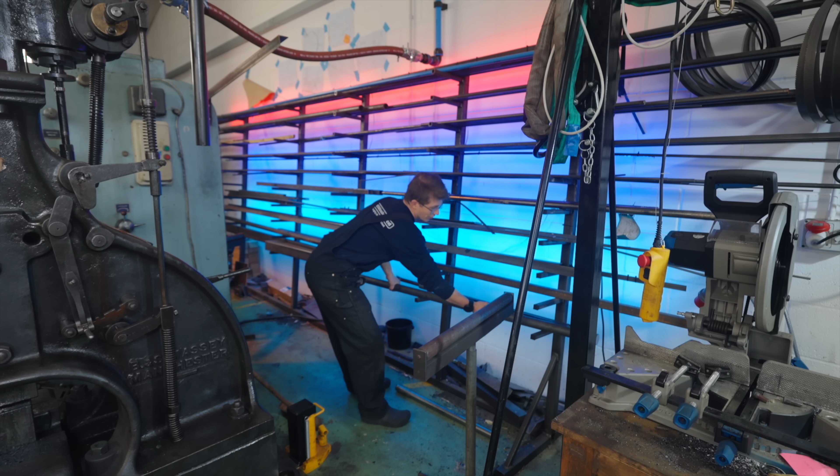I want to try making my own titanium Damascus glasses. I had to get my first pair of glasses at the age of 11, and at the same age, I fell in love with making things from steel. The idea of making my own glasses has been lurking in the back of my head for a long time, but there are some downsides to my namesake material. It's quite heavy, it rusts, and it will tarnish the skin.

But over the last few months, we've been figuring out how to make titanium Damascus here in the workshop, and it's got some great advantages. It's about 45% lighter than steel, it can be about 30% stronger, and we can turn it into some amazing patterns with crazy colors. So hopefully we're going to take this idea from the back of my mind, slap it on my face, and make my own pair of titanium Damascus glasses. The first step is material prep.

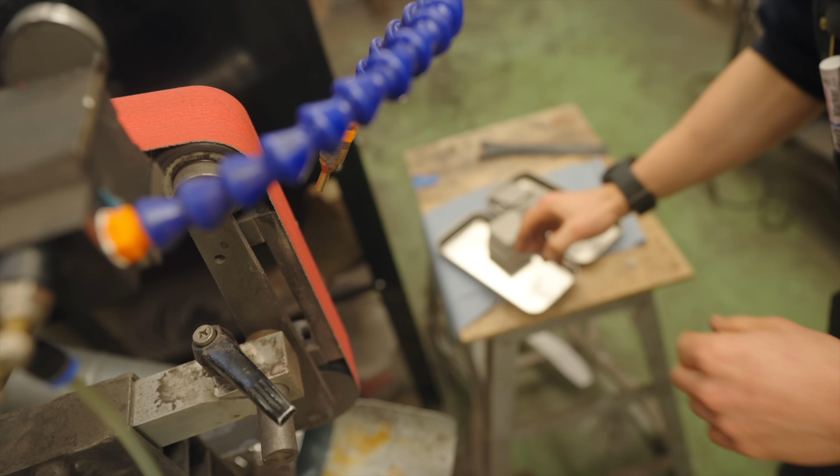Bugger! Oh my god! We are approximately a minute into the video and it is already side project time. I've been having to do a lot of cleaning of small little bits of thin material recently, and it's a nightmare. Doing it on the belt grinder, I end up grinding my fingers more than the workpiece. This Scotch-Brite wheel's okay, but sometimes not aggressive enough and also has a tendency to throw the pieces.

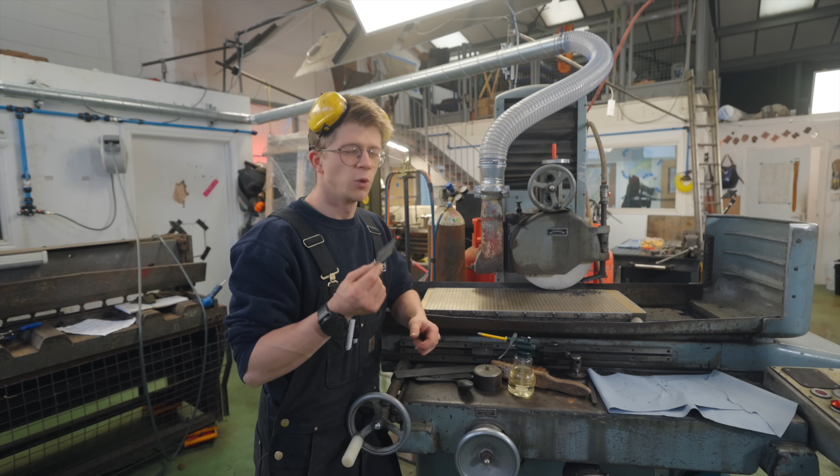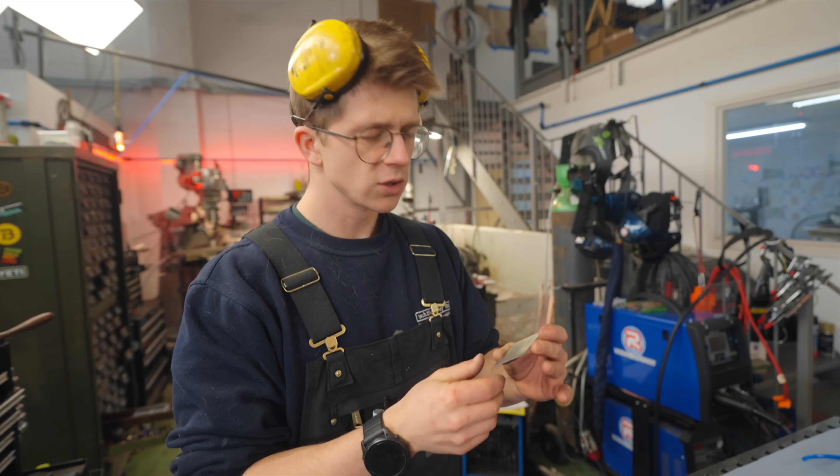One of my options of cleaning these parts is to use the surface grinder, which is something I do want to try, but because titanium's non-magnetic, it's going to require gluing the pieces down. And my suspicion is that that's going to be less efficient than just quickly cleaning the bits up at the belt grinder or the mop. So I then thought to myself, what if we could suck it? They use vacuum fixtures all the time in industry. Why don't we try making our own? A little plate with about 1.5 millimeters lip, a hole, something to seal it, connected over to the vacuum pump.

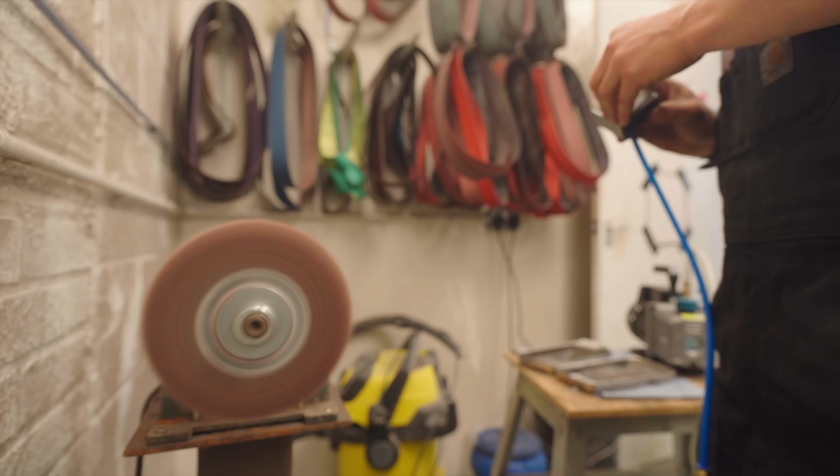It's not bad, eh? Let's see if this is a decent proof of concept. It's brilliant! This is great! I'm quite hopeful that we're going to be seeing a few more of these in other people's workshops. Please don't hold me responsible if this blows up your vacuum pumps, though. It's probably not very healthy for it.

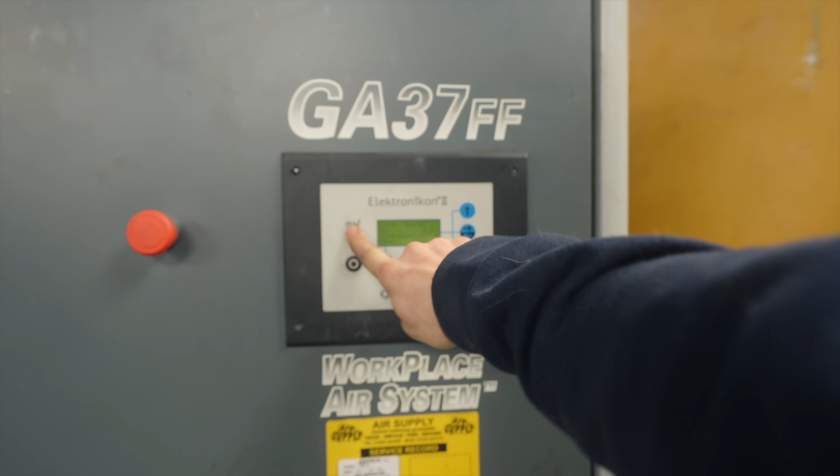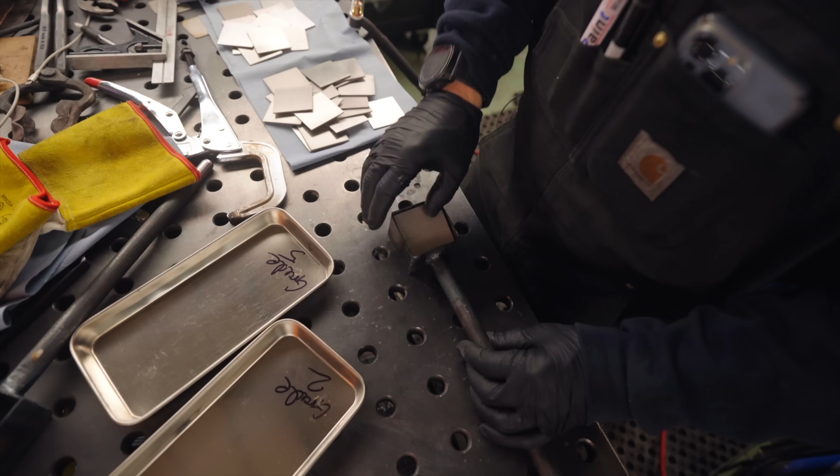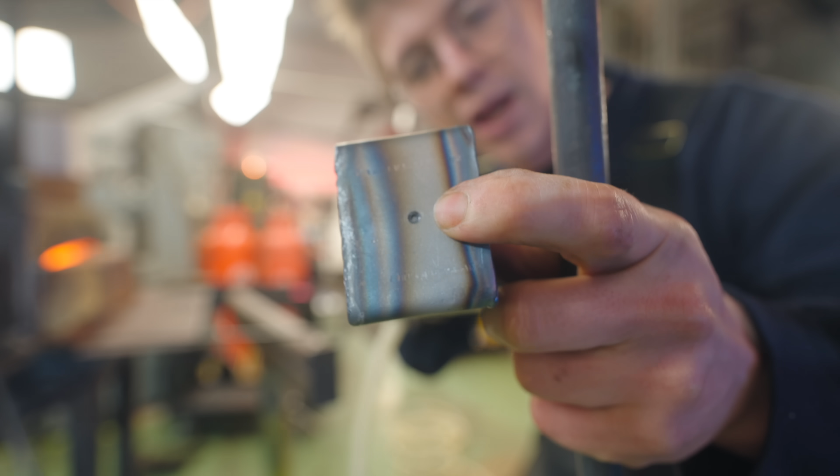We got 2 tasty chunks, 2 blockerinos. Reminder if you're new, the whole purpose of these boxes, these canisters, is so that I can pump argon gas through this tube and out that little hole to fill the insides with that argon, which is inert and means that we're not going to have oxygen reacting with the titanium. Go time!

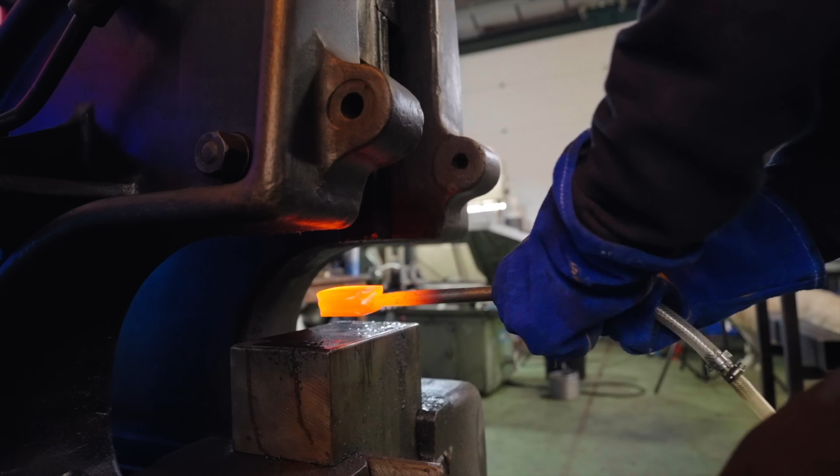That's worrying. That tells me something's not right inside there. Whoop. The fact that it wasn't showing an even temperature throughout shows me that heat isn't conducting as it should, and something's been allowed to cool down way more than it should, which wouldn't happen if it was one homogeneous block. There's a very good chance that I've ruined that billet. Next one in. Here we go.

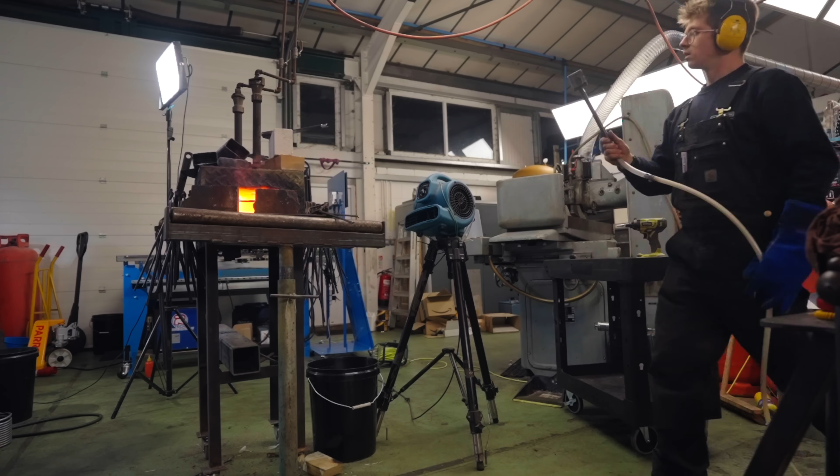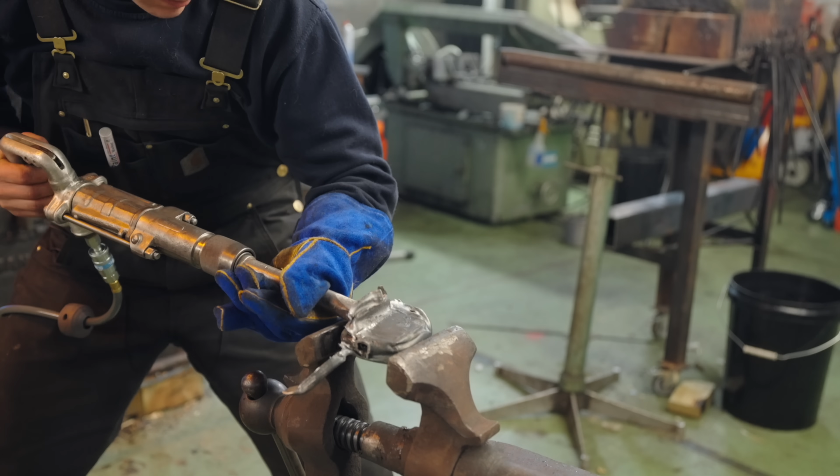Wow, that's weird. So, we can take the jacket off once they're welded because the oxygen's not going to get between the layers once it's stuck. You'll see one of these looks a lot different to another. This one looks as we'd hope. This one, well, a bit funky.

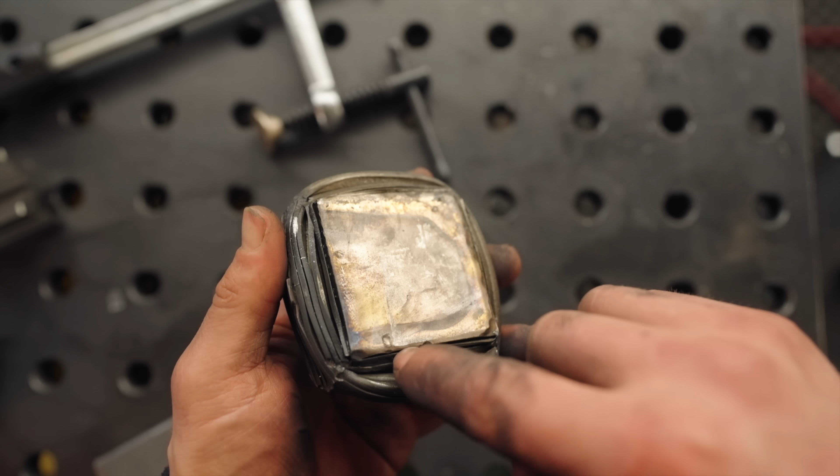Now what I suspect happened is because of that enormous unwelded seam and me increasing the amount of argon flow to make sure there was no oxygen, I think it's likely there was so much argon flowing through this top surface, it was having the effect of cooling it, meaning this was a lot colder than the rest of it.

So this, we can get rid of the rough edges on the grinder, maybe in the mill. That, I'm gonna take it to the bandsaw. We don't want any of these nasty seams in the material when we go to forge it down and change its shape. So all of this has to go.

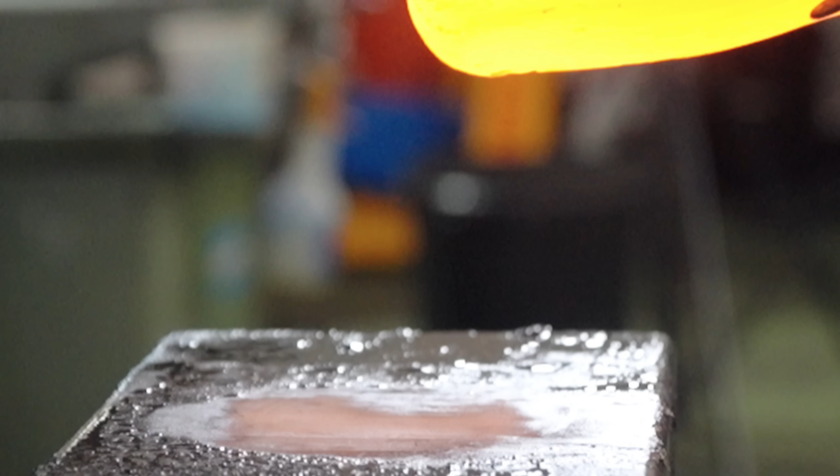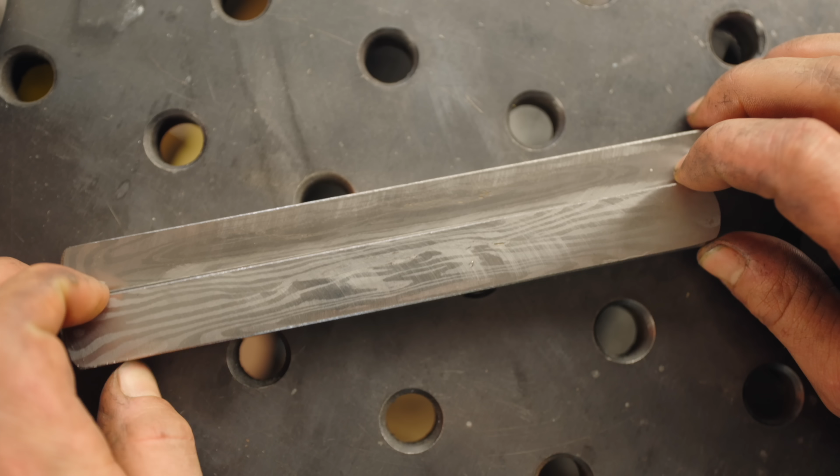Right, this has turned into a failure. Not a very happy blacksmith today. Look at these inclusions where it wasn't welded. More of them. On the other piece, the billet is practically microscopic. It's so small now. And look at that mess.

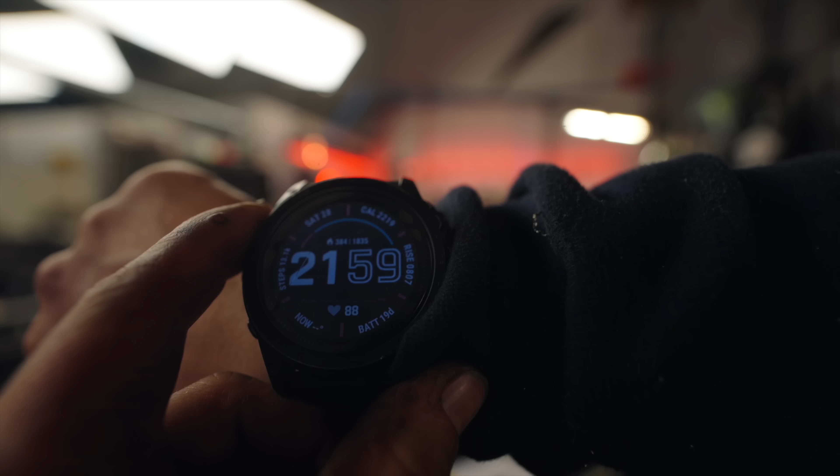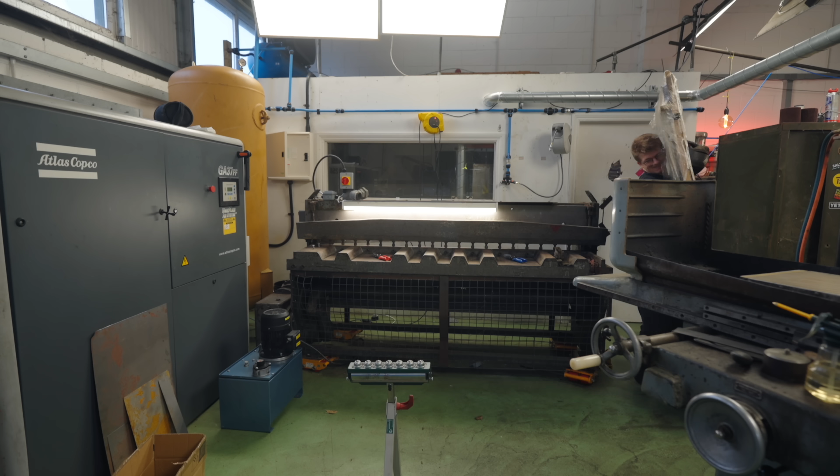I'm gonna call it quits for tonight. I have run out, or near enough, I don't have enough for new billets, of these sized bits of titanium. So in the morning, we're gonna have to unbox the big sheets, these bad boys, and start all over again. Yay for failure. Sick.

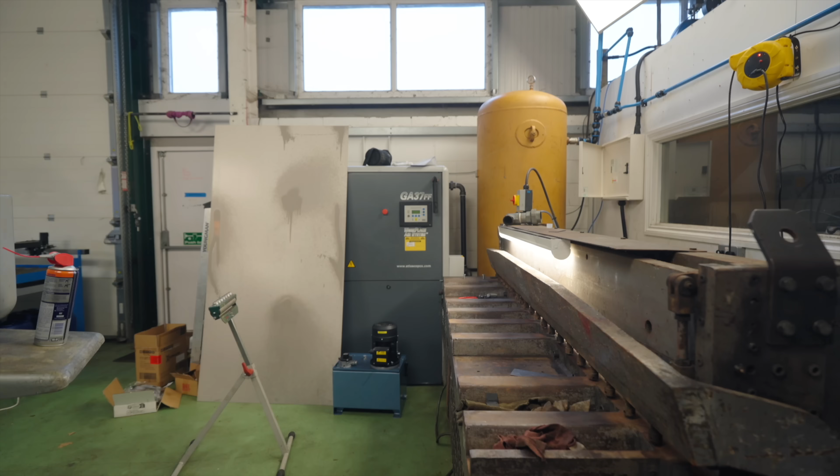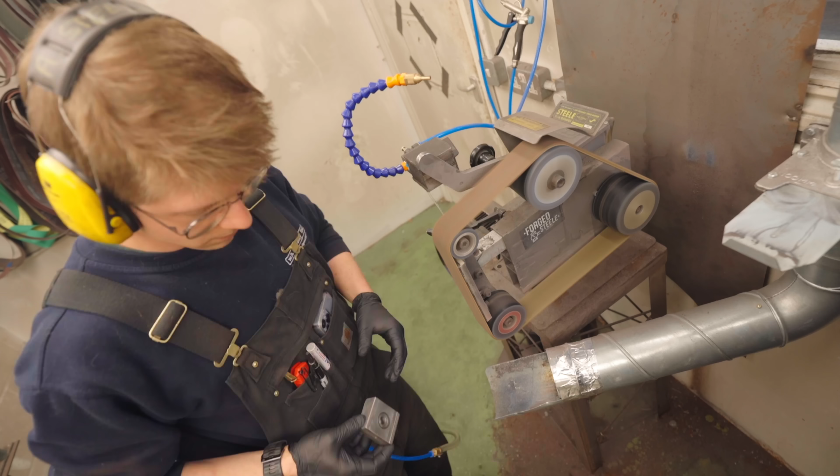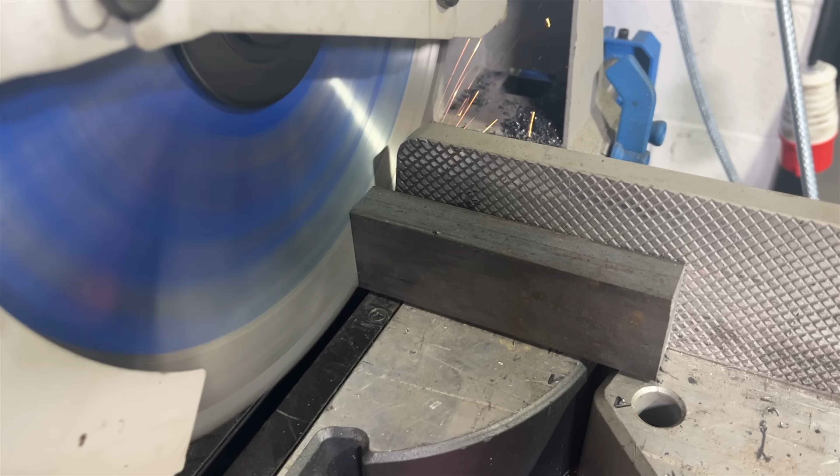Thumbs up if you just ground off the tip of your thumb. Yay! Obviously, hand grinding vacuum fixture number 1 is not big enough for these larger coupons. Side project 2. It's gonna go together like this. There we go. See if it works. Yippee! Oh, it wasn't filming!

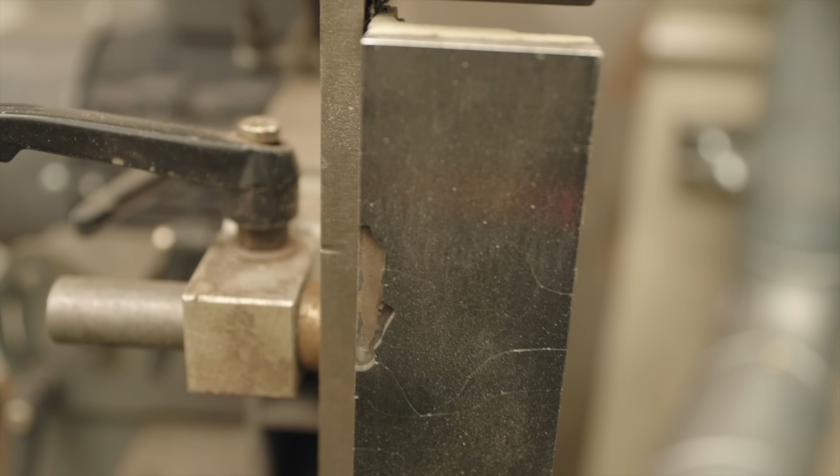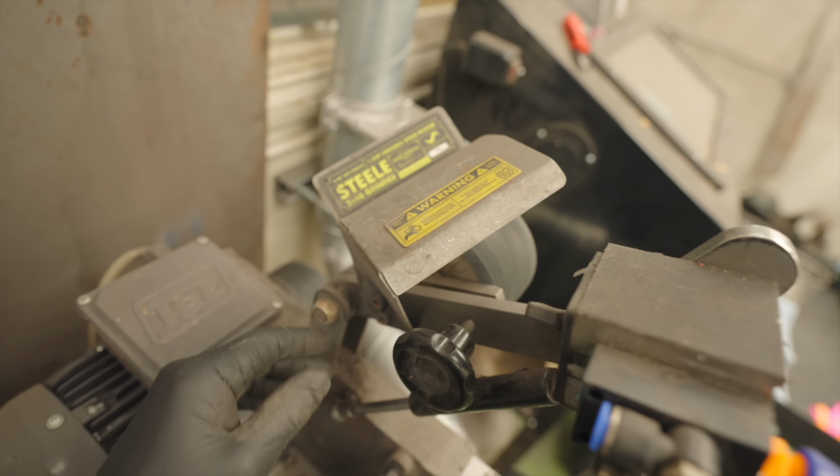Shoot! It just exploded! Oh, I hate when that happens. Oh no! No! My carbide platen! Oh, poor thing. You lasted 8 years though, so not so bad. Woo, hot, hot, hot. There we go. Look at the damage the belt did over here. It completely mangled that guard.

This time around, we're gonna get precise temperatures. I'm also gonna take it a little bit easier under the hammer. This should only take 1 heat. Just gotta treat it like all those titanium steel experiments I did. Let's hopefully get a nice weld. Woo! Should I have done more? I don't know. Fingers firmly crossed.

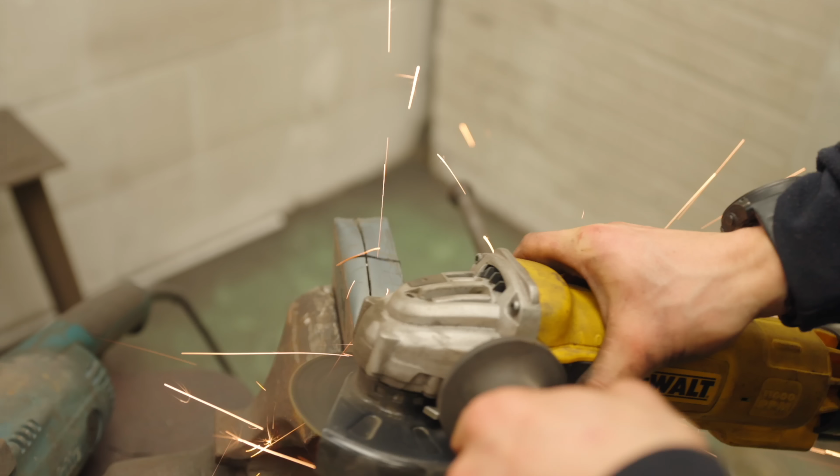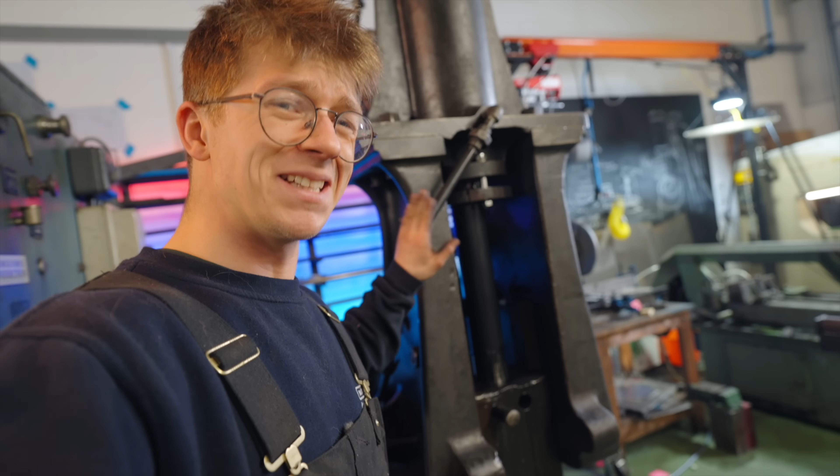That looks beautiful. Okay, so this time around, instead of using the steam hammer, I'm gonna come over here to the Stanko. And the reason for it is, it's gonna be a little bit gentler. I kinda got the feeling that this old girl's just a little bit too strong for that poor little bit of titanium yesterday.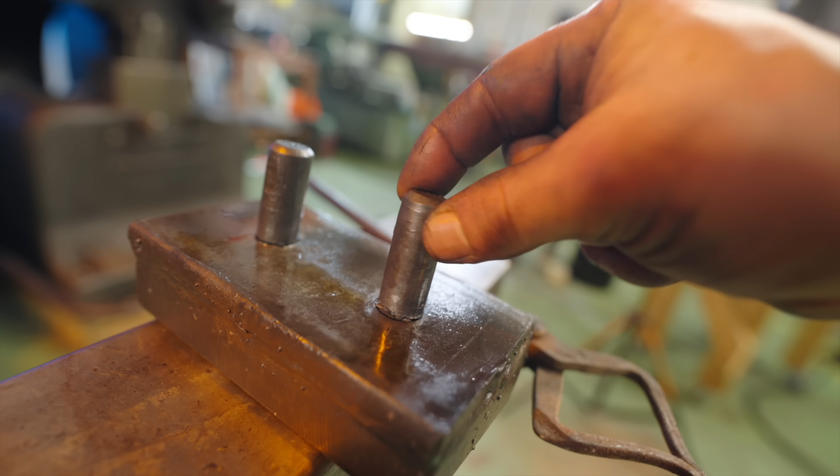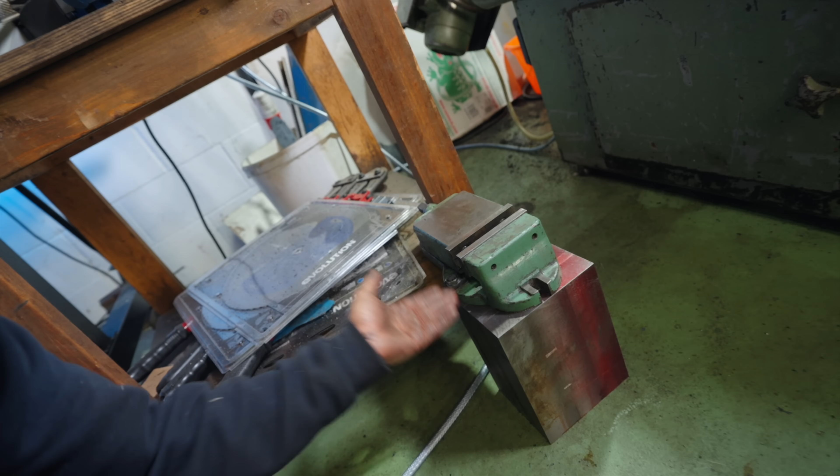Off camera, I had the delightful task of fixing this situation. I had to make a new top die insert. This is obviously the fatal flaw of the design, but this becomes unattached. Funnily enough, I had earmarked this block of 4140 for slicing up and machining into brand new dies and getting away from that weak insert system. But now that this thing has become a really beautiful vice holder for the bandsaw, as you saw in the last episode, I need to order some more steel, because this is a really important job. We got to get away from this, you know?

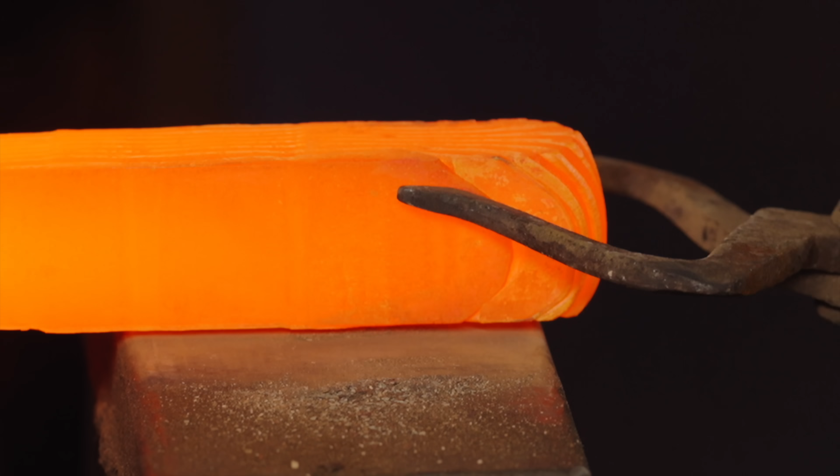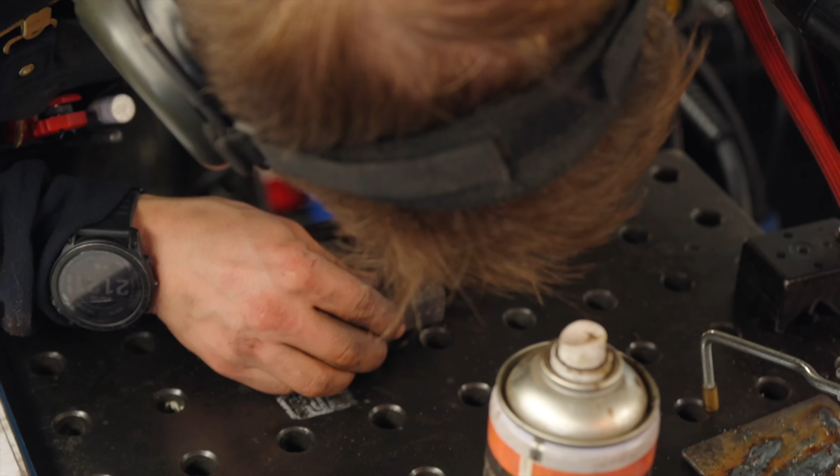I want to forge this bar down to a really consistent size, and the best way to do that is with kiss blocks. When we were in Montana, I had one of our colleagues make up a beautiful set of them, every size imaginable, flipping back and forth. They were the bee's knees, but we don't have them. And since it's been more than 30 seconds working on the actual project for the day, definitely time for a side project. Damn, that's quick, even in 6 mil. Pretty simple. Kiss block stops the top die from going any further.

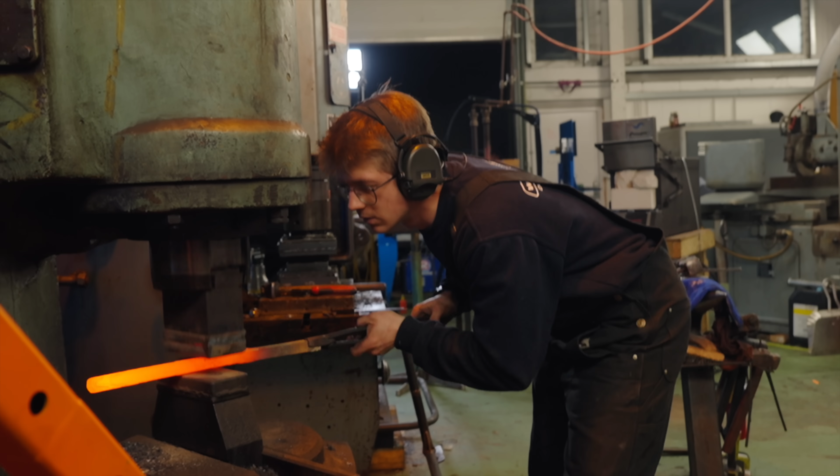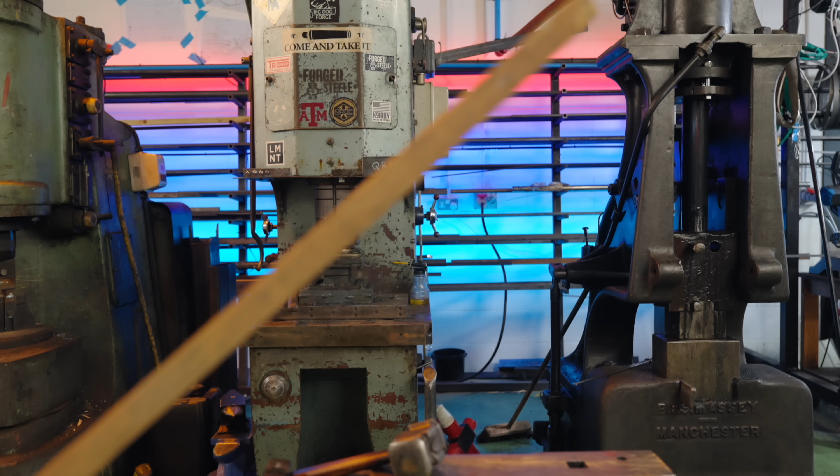Tell you what, the good thing about this project is I'm getting my practice in, and I definitely need it. I think it might just be that I got really quite lucky on my first few attempts at making titanium Damascus, because boy, this is definitely challenging. We've got a flapper. Here's a little bit of delamination that's come through all the way across. Big old flapper, unwelded bit. I'm gonna cool this down nice and slow.

And I think that makes for a nice point to talk about the pattern that I want to try and do on this. After our disastrous failure 24 hours ago, my initial plan was to make up a mosaic pattern, but having to start all over again and being under a time crunch made me decide to do something else. We've just forged it into a rough round bar. I'm gonna put it in the lathe, and I'm gonna turn down the outside till we're through the scale, and then we're gonna twist both sides in opposite directions.

We'll then be able to forge it down, cut it in half again, stack it up 4 ways, and get a chevron pattern. Same type of thing that you saw us do on the Viking sword all those years ago. But of course, this is going to be the first time I've ever done it in titanium, and I don't even know if it's been done in titanium full stop.

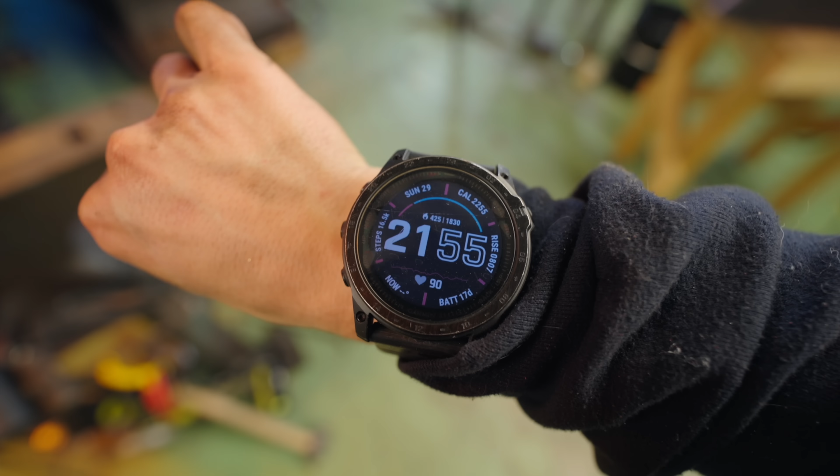I must say, I think I'm the worst person in the world at judging time. It's 9:55 again. For some reason, yesterday morning when I started this project, there was actually a very significant part of me that thought by this time today, I would have a finished pair of titanium Damascus glasses.

I put some square ends on it so that I can stick it in these. As I said last night, I need to twist half of this one way, half of this another way. But my plan is to do it to the same bar. So about halfway, we'll stop twisting it clockwise, and we'll start twisting it anti-clockwise. All right. This is scary. Kind of a little bit exciting, kind of a little bit scary. A little concoction of everything. 3, 2, 1.

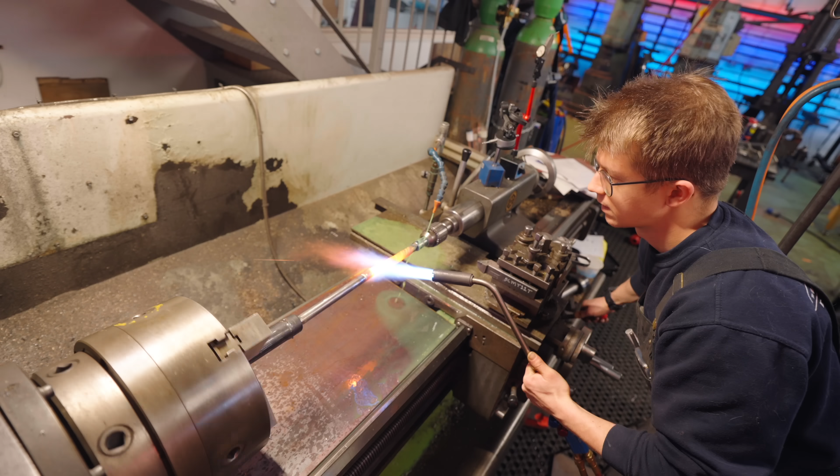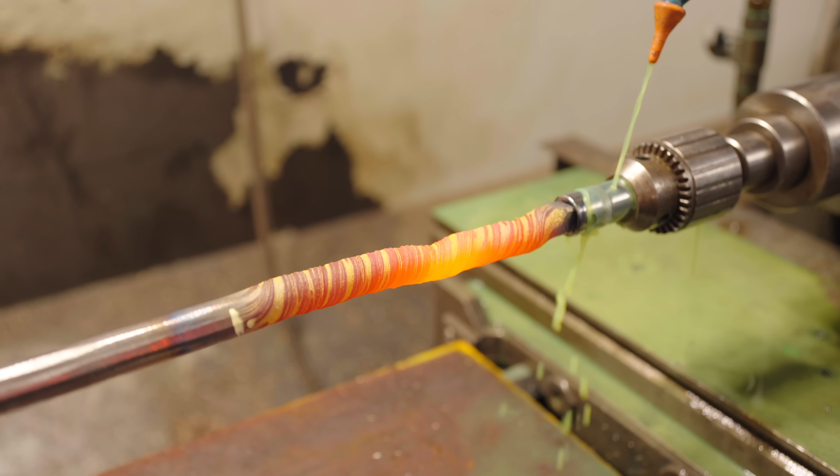This is so fun! Ah, no! I went too far. Of course I had to push it. I think I just broke it in here. Maybe we'll get lucky and it'll be right halfway down where I was planning on cutting it anyway. I don't know. Why can't I just be happy with a little bit of twist? Now I'm gonna twist this the other way.

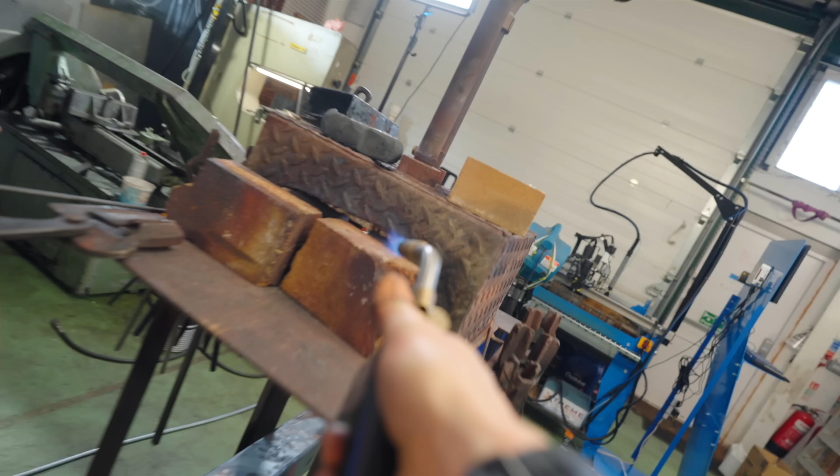Well, we're soon going to find out if it's ruined. It's like forge, make up a 16mm kiss block, forge it down so we can clean it up, so we can forge it. It just goes on and on. Delish. Back to the lathe.

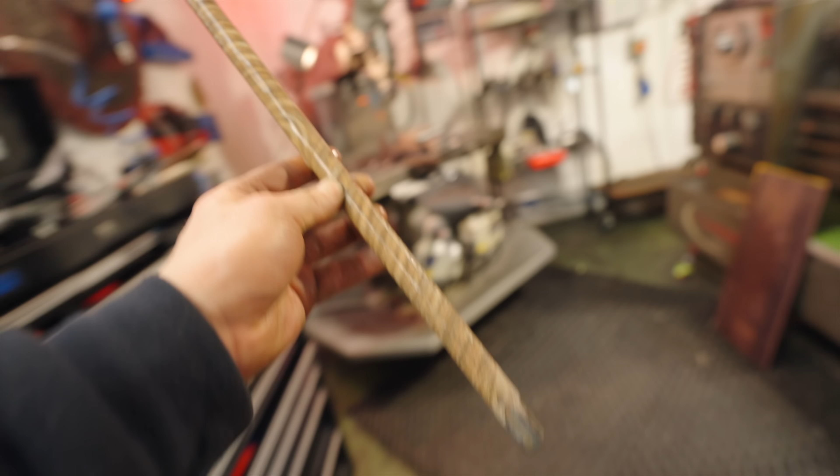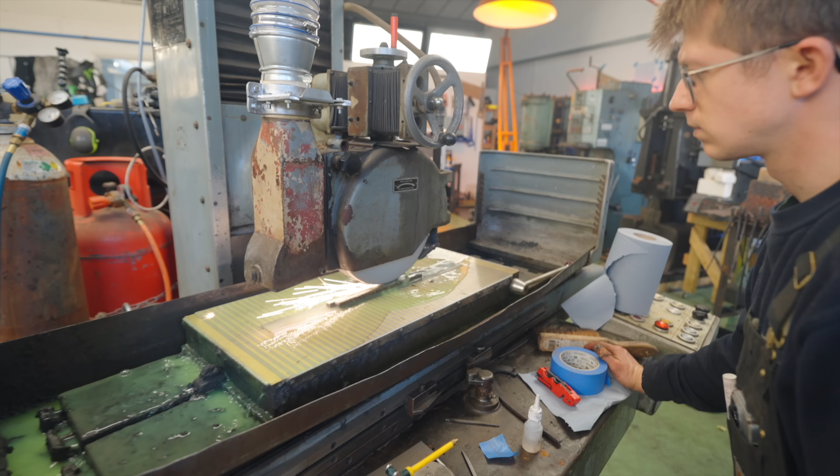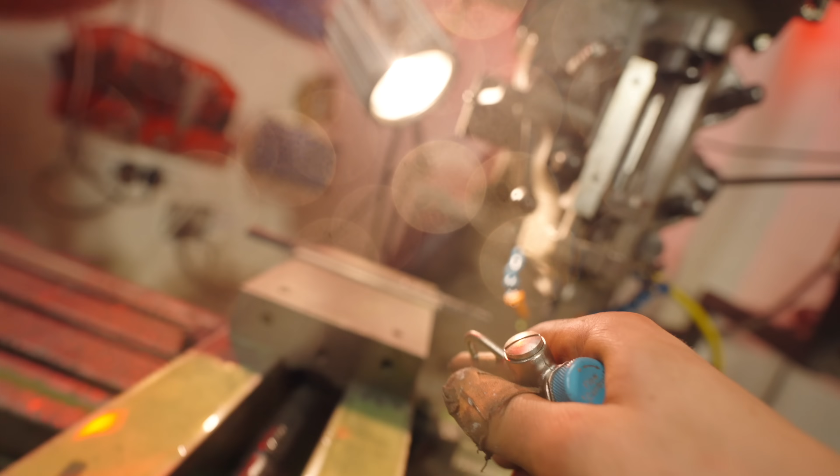The way this was clamped on the last operation, one of these faces came a little bit out of parallel, so I'm going to go ahead and whack them on the surface grinder. They should be pretty... What? There's the magnetic chuck broken again. This is how we're going to do it. A little bit of steel, slap that puppy there, boom. Super glue. I didn't like it, so back to Chatter City in the mill. Right in the face. So there's our chevron popping through. Now these things have got very small. Oh my goodness, it moves.

Jamie, welcome back. How's it going? You have a nice Christmas? It wasn't the best. I was very, very ill. I've been very sick. The whole time? Mostly. That's a miserable way to spend Christmas.

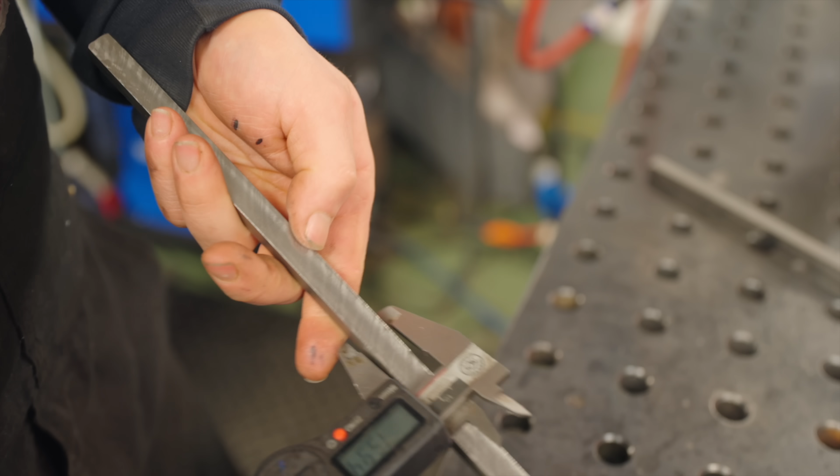What are we doing, Jamie? I needed calipers. Look how much this thing has shrunk. 10.7mm square. It's tiny. We had planned on cutting it in half, making it 4 layers of twist, but I don't think it's gonna be enough. So I think we're gonna try and cut each into 3 pieces, giving us 6 layers of twist.

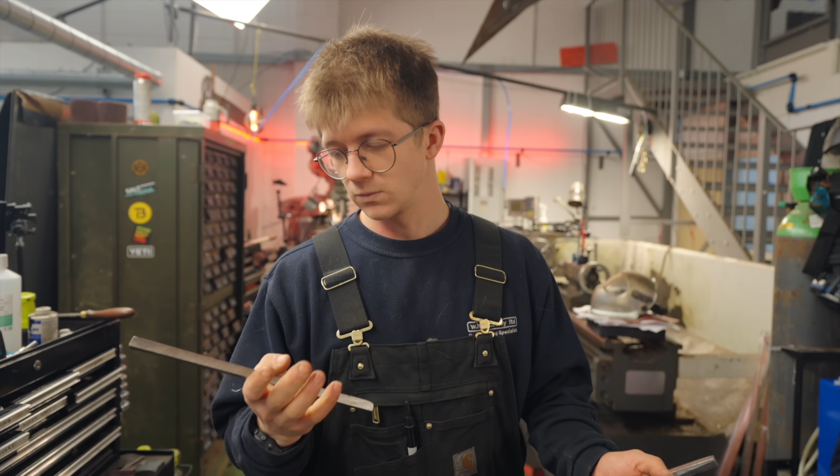Now, one thing that is on my mind, though, is that on one of these, the quality of our material is really high, and on the other, we have a decent amount of unwelded material, which is not good. It looks like crap. I'm gonna try my best to orient it so that it's on the outside, on the side of the billet that's gonna get machined off.

I need to stop being cheap with the billets that I'm putting together, and instead of making what I think is enough material for a project, I need to make a stack of material that is just so large that I could build 3 of the projects that I want, because then I'd have enough spare material to be able to just throw that out, but I can't. So this maybe is foreshadowing a future 3rd attempt of making material for this project.

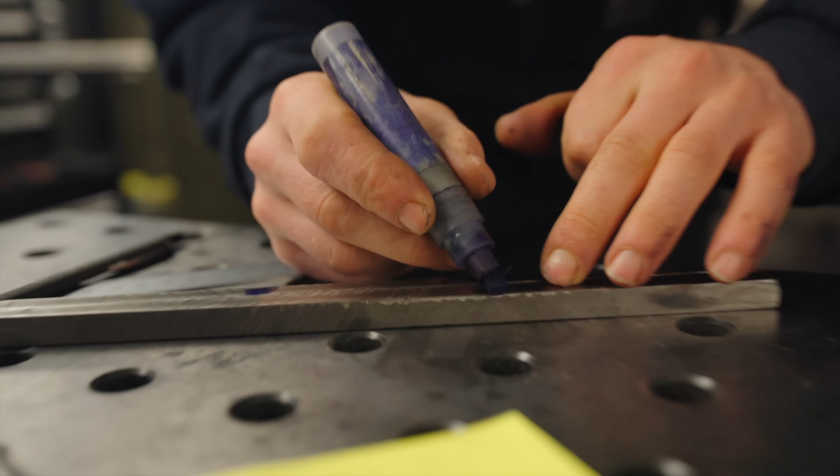I should be wearing a respirator. Should I? You are. Oh, yeah.

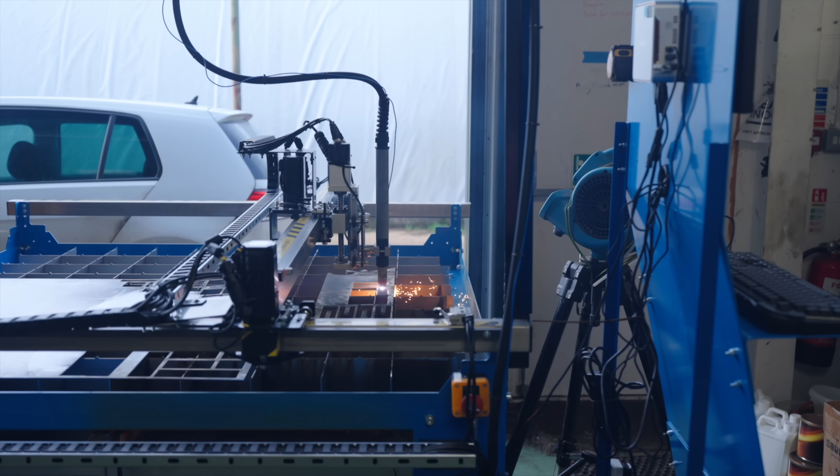Time for another side project. I'm joking.

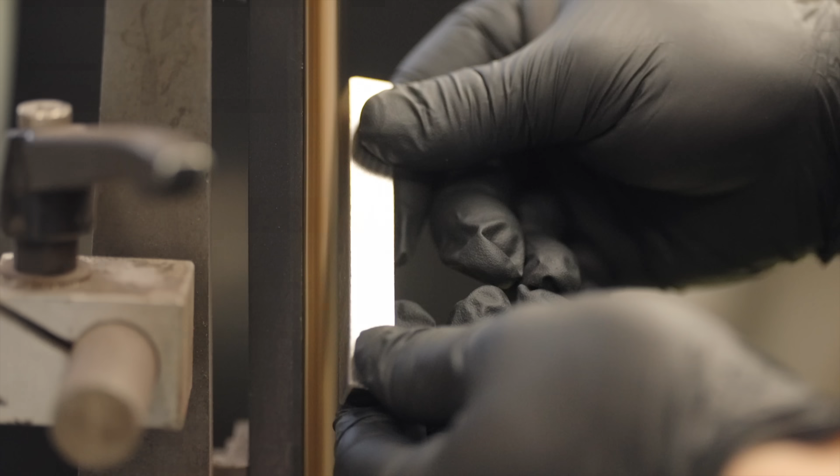So here's the plan. As you see, we have ourselves a 5-sided box. The top hasn't yet been welded, and that is going to be what we assemble our parts in. But that's a lot deeper than those little bits of square bar.

Well, I cut 3 more bits of grade 2 titanium that we are going to weld on the side of all our square material to give us an extra 6 millimeters of thickness, so that we can have the Damascus on the front and build up a little more material by having the grade 2 on the inside, the back of the glasses.

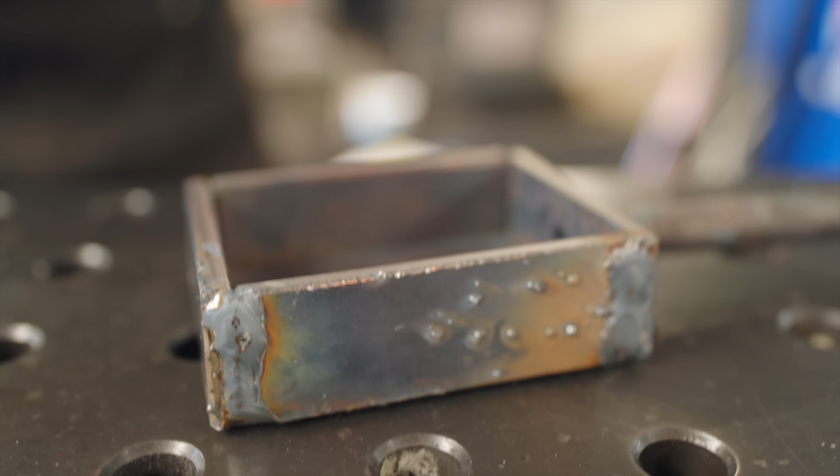Have you been writing Braille on the side of this? Yeah, new hobby. It says, Jamie, you're a silly bean.

I've measured the amount of gap we have. We should be able to force these in there to take it up.

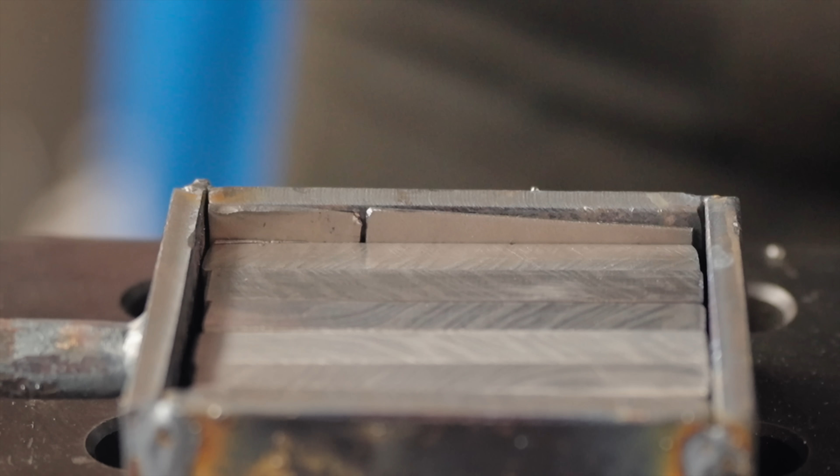I may have just committed to something I can't cash. Well, that was a great idea until it wasn't. A little gratuitous application of mechanical persuasion.

Right, we're gonna MIG weld up this box and we're back purging it with argon.

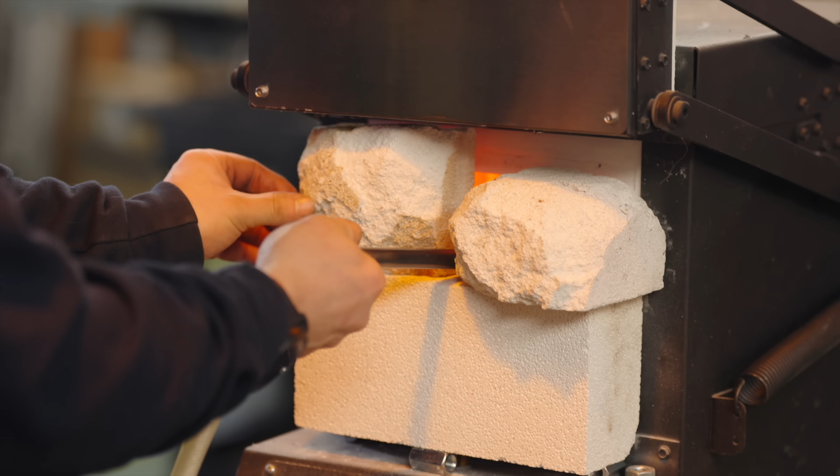This is going to be an incredibly difficult forge weld. I know it sounds like I say that all the time. You literally say that every time you're going to forge weld anything. Well, it does happen to be the case, Jamie, that we're doing very hard forge welds all the time. This is going to be one of the more challenging ones. Now, the reason this is going to be challenging is because we need to forge weld in 2 planes.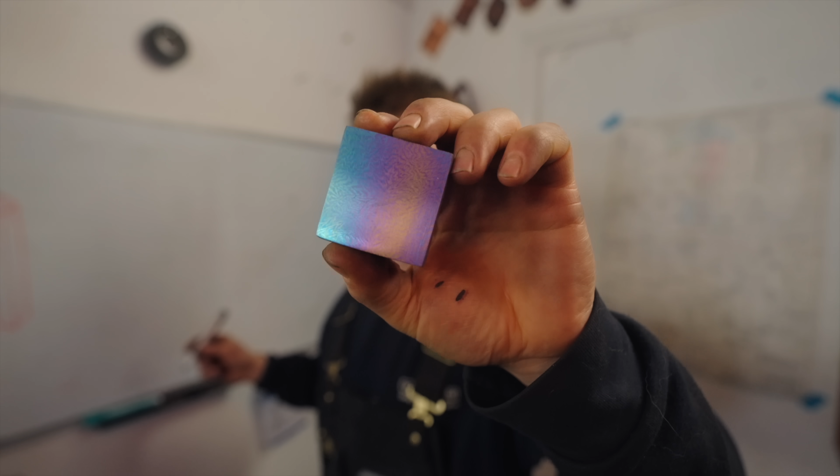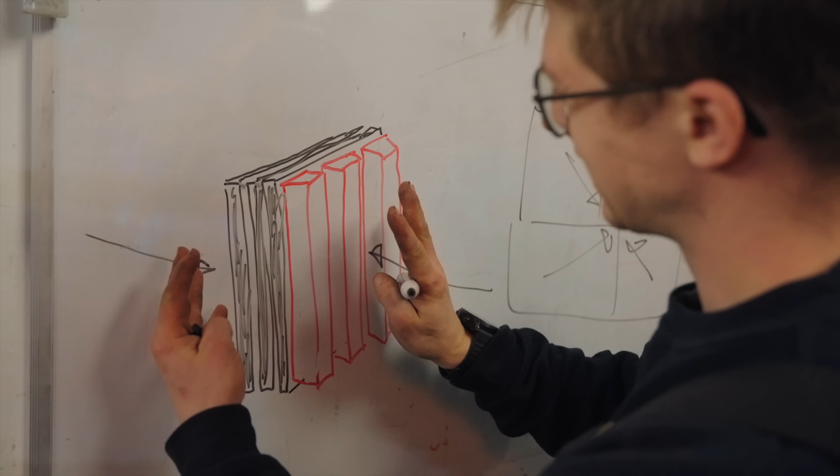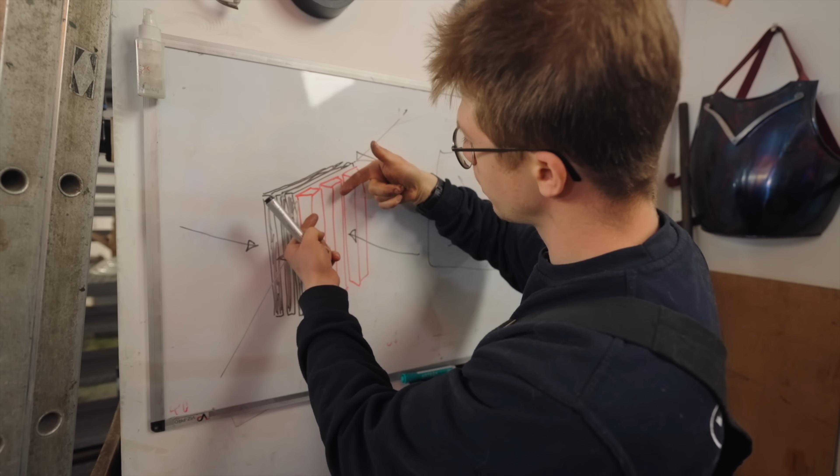You remember when we made this block up, we solved that issue by making squaring dies so that we could forge from all directions with every squeeze. We can't get around it that way this time. I have to hammer from this direction and that direction, get them close and stuck together, and then hammer from this direction and that direction. Which means we might get our little square bits stuck with a gap between them, which will stop them finally bonding when we then forge in the other direction.

Well, if it doesn't work, at least you can just make a 3rd billet, right? There is a good chance that we're gonna need another billet. I do not like the inclusions that we saw in this one.

I've got no idea if it welded. I did have fun hopping about the power hammer though. This is fun. Whatever's there is there.

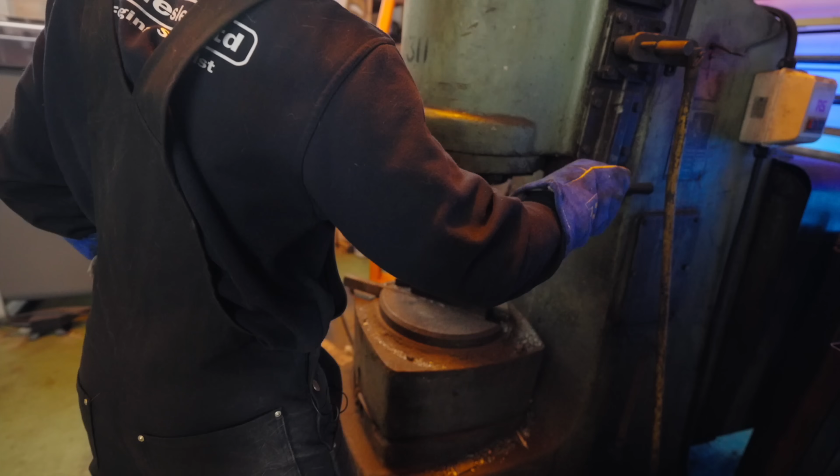Whatever shall be, shall be. If you shake it, does it rattle? No. Well, it's probably good then.

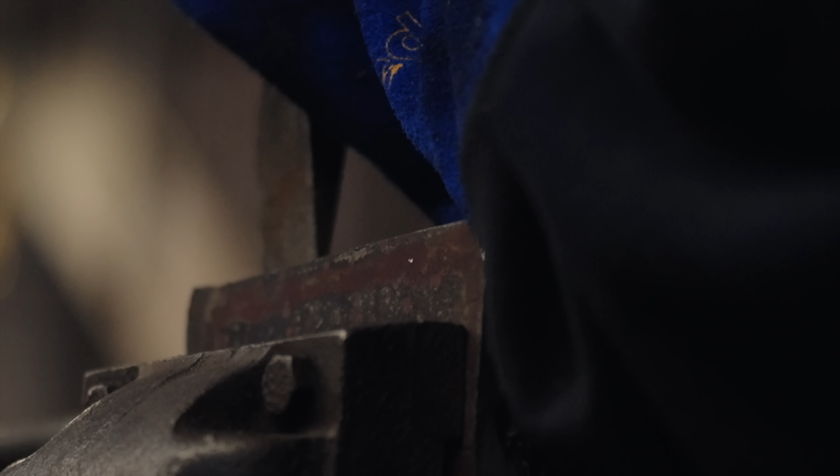Holy crap, I think it's done it. No! That's my titanium! The titanium and steel bonded more than the titanium and titanium. Oh, no, Jamie, I think we're fine. I think we're fine. Phew.

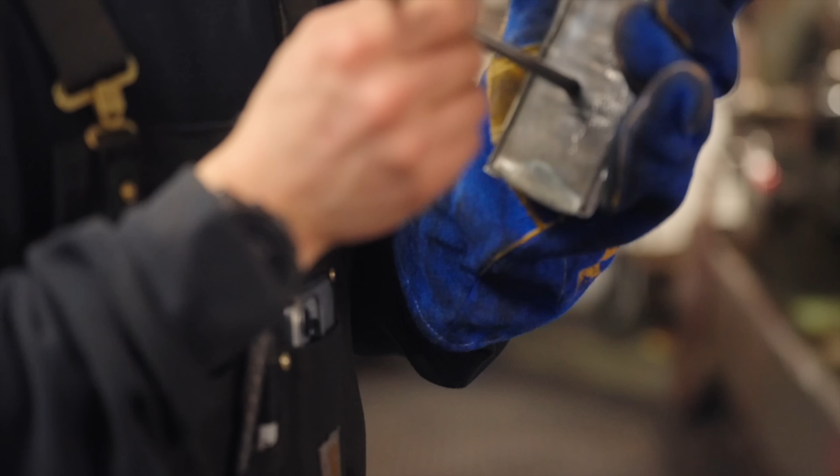Okay, we still have 3 bits of titanium there. Woohoo! Look at the inside of the steel. How sick is that? It's picked up the impressions of the twisted Damascus, the chevron pattern.

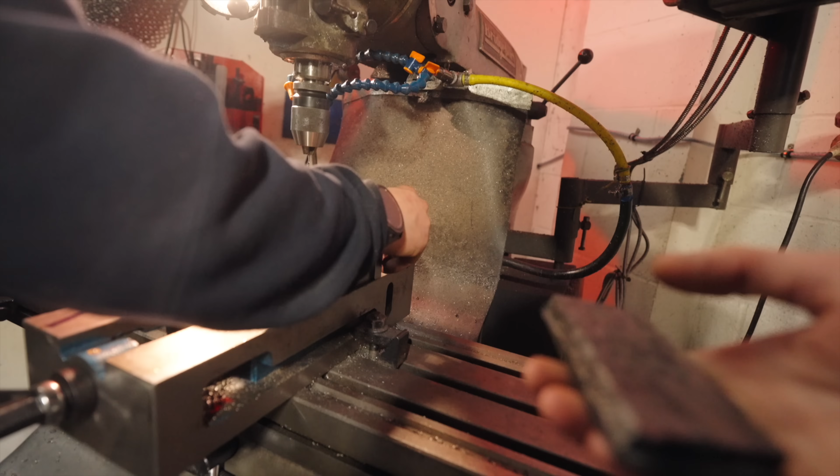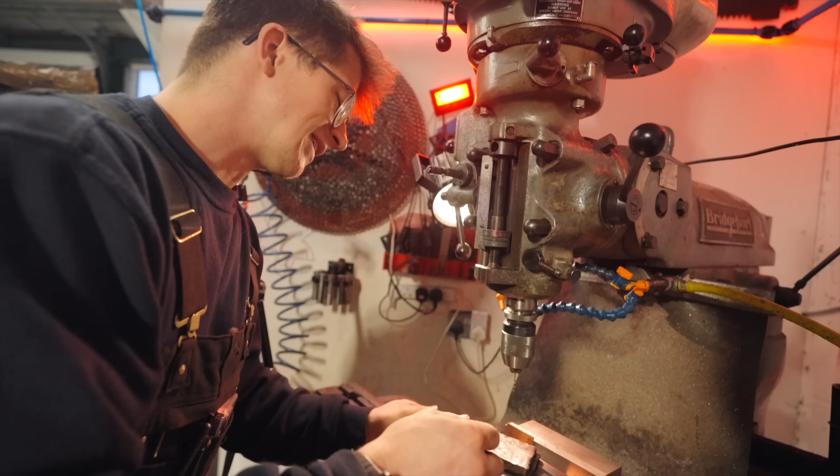You reckon we'll get a pair of glasses out of that, Jamie? I think you've overestimated how much material you need, because the weight of this is like a dozen pairs of glasses. Well, maybe, but I do kind of see what you're saying, but we're gonna have to cut a lot off with the mill and with the Wazer to get this done. So there's going to be a lot of wastage. If there wasn't a lot of wastage before, there's going to be a ton coming up.

Oh, it's pretty. This is going to be epic. Oh, the heat might have just exposed some issues. Look at that right in there, near the tip of the tongs. That doesn't look very good, does it? I don't know how bad those cracks are, but we're going to forge it down, get it to the dimensions that we need, see how it looks.

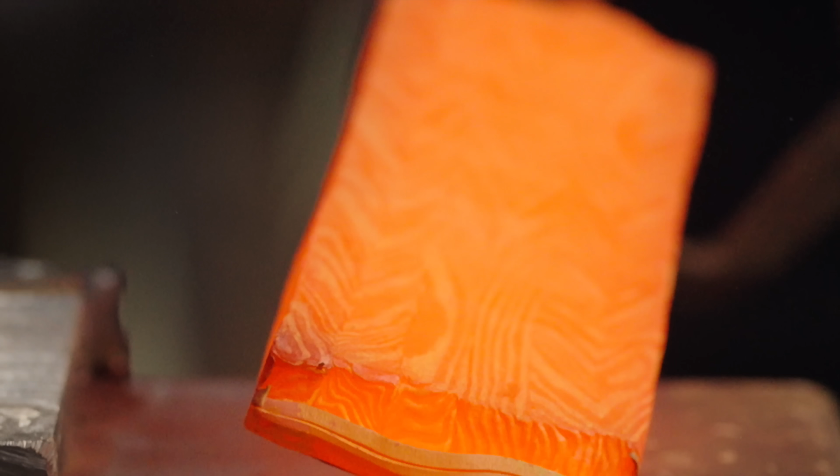Jamie, see the different colors right here and here? That is a sign that it's not stuck, because it's not conducting the heat evenly. That's hotter than this.

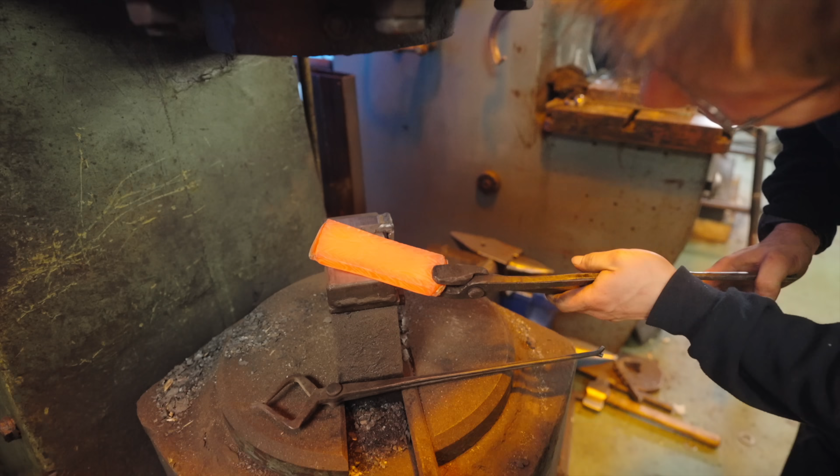Ah, it doesn't look good, does it? It can't be good. I want to try and stretch it out wider. Look how deep that is.

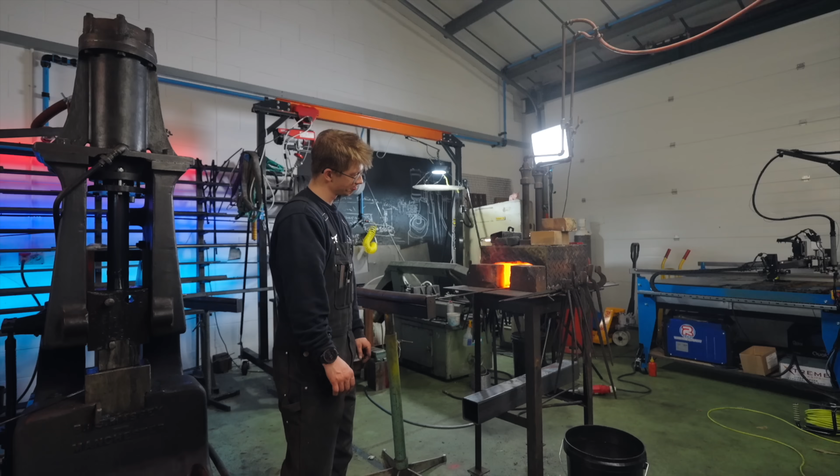There's actually a term for a crack like that, you know. What is it? Creek. Feel like that's where we are. Where do you think Creek is? I think you'll find that it starts about 2.5 days ago and it meanders all through the weekend into today, and it's right here.

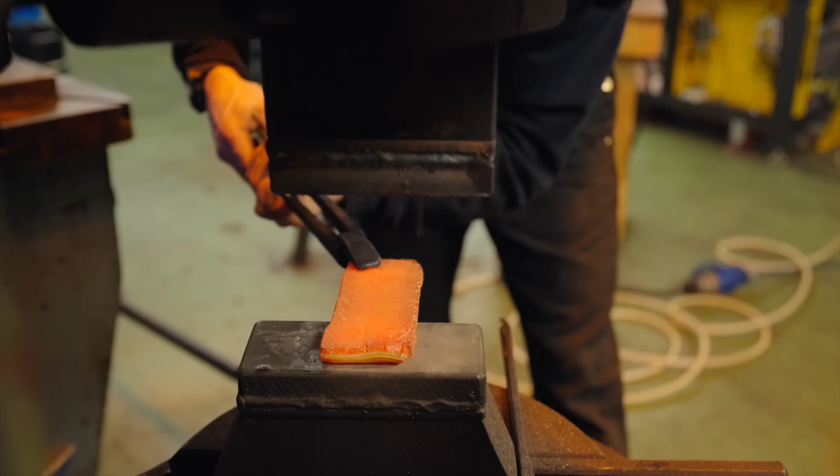I don't know if this has worked. It doesn't look very promising. No matter what, I think we're learning things about titanium Damascus, and frankly, for me right now, I guess that's the most important thing. Look at me, looking at the bright side.